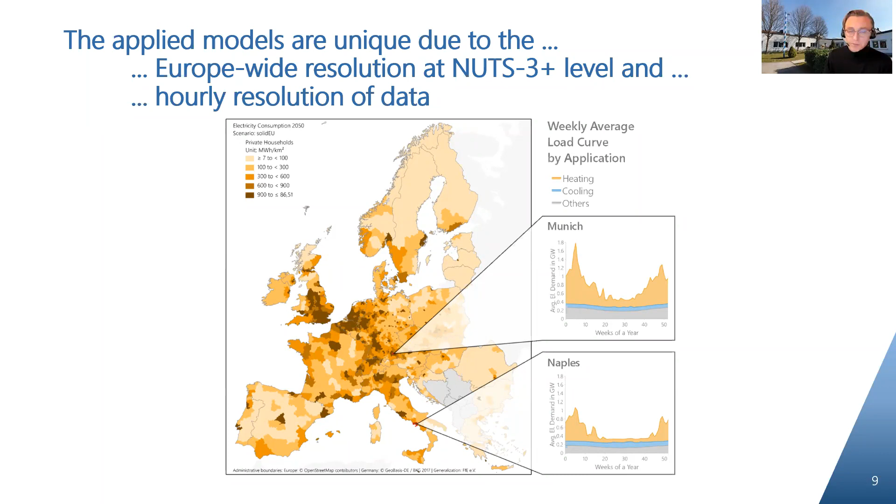What is, I would say, unique about the FFE toolchain and the models we used here is that we achieve a very high regional and temporal resolution with these models, which enables us to achieve the goal that we set out: to analyze Europe and the EU 27 plus 3 countries, but also be able to break down the European transformation pathway into regions in order to show what the challenge we are facing means for the individual stakeholders in each region. These few slides were used to introduce eXtremOS, and I think that's our first point where we can take some questions.

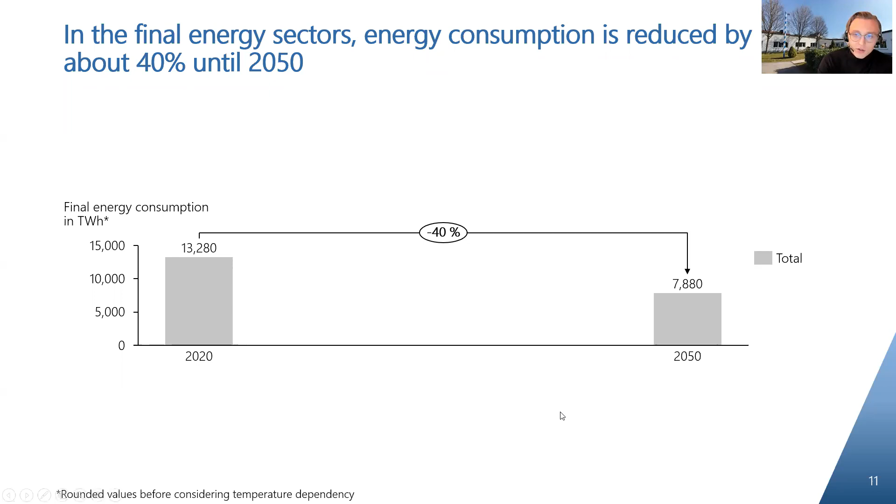And behind these gray bars that you can see in the charts now are the results that we obtained from our detailed sector modeling. And this is still a relatively high level of aggregation when it comes to the data that is actually behind all of this. But if you take the sectoral perspective, we can basically describe what happens in the energy system between 2020 and 2050 by clustering everything that happens in each sector according to these 3 categories.

So that is sort of the macroeconomic perspective, which includes population and gross value added development. And this is based on country and energy industry branch specific data, which shows that, due to slight population and slight economic growth throughout the time period 2020 to 2050, we get a slight increase in the final energy consumption across all sectors. This includes only the mentioned macroeconomic effects.

And it is most pronounced in the industry sector because population increase is relatively low, and there's a slight, on average, 1% per annum increase of the gross value added in the industry sector, leading to a larger increase compared to other sectors.

Then there's the energy efficiency component. This includes a variety of efficiency measures in all three sectors, including very process-specific measures in the industry sector, building refurbishment, etc., in the household sector, which leads to a reduction in final energy consumption.

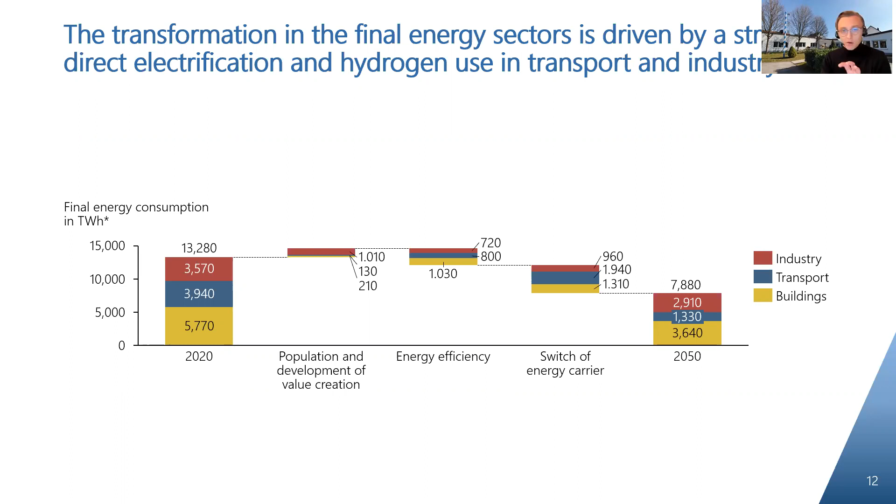Now, this is the sectoral perspective on final energy consumption development and the effect over that period of time. And there's the other very important perspective, which is the energy carrier perspective, and this is shown in the graph here now. So what actually happens with the energy carrier split over time. You can see that in 2020, biomass and electricity roughly account for a third of the final energy consumption. And by 2050, 90% of that final energy consumption is electricity, hydrogen, and biomass.

So these three energy carriers plus synthetic fuels that are required to reach deep emission reduction and which remain in hard to decarbonize areas in these three sectors, such as air travel, are the energy carriers of the future in our Solid EU scenario. Now, this was in very brief terms the development of final energy consumption. Later on during our talk, we'll focus more on the models that are also behind final energy.

But now let's switch the perspective towards the energy supply side and take a look at how energy procurement actually works, starting with hydrogen and then going towards electricity. And for this, I will introduce my colleague Stephan Kigle, who was responsible for the supply side modeling in eXtremOS.

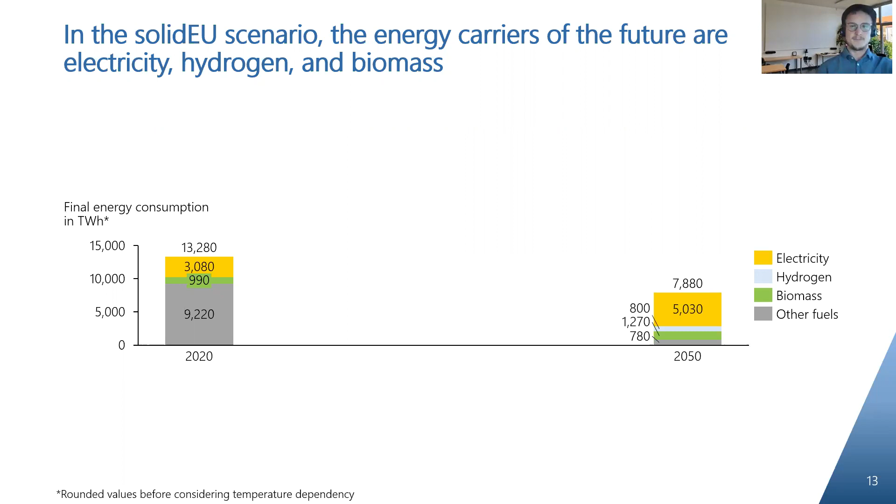Yeah, thank you, Andrej. So at first, we'll now have a look at the hydrogen production side and how our energy system model ISAaR will finally meet the hydrogen demand of the final energy consumption sectors. You just saw that there were 800 terawatt hours of hydrogen demand in the final energy consumption. Additional to that, we also have a hydrogen demand from the industry feedstock, which we have to supply. So in total, we will have to supply roughly 1,000 terawatt hours of hydrogen.

And in Solid EU, we had some assumptions, which I will shine light on in a little more detail in a second, but I want to start with just one main result, and that is if, as in Solid EU, hydrogen is produced exclusively in Europe, there is a need for a seasonal hydrogen storage. The storage is filled at times of high generation from wind and photovoltaics at low electrical loads. So let's have a look at this result in a little more detail on the next slide. Andrej, could you? Yeah, perfect.

I already mentioned that there are some strong assumptions in this type of modeling. So first of all, we have the assumption that hydrogen demand must be met within Europe. So we do not have any import of hydrogen from outside Europe. This is quite strict, but as we are in eXtremOS, which is quite an extreme scenario, I think this assumption is valid, and it's really interesting to see what happens here.

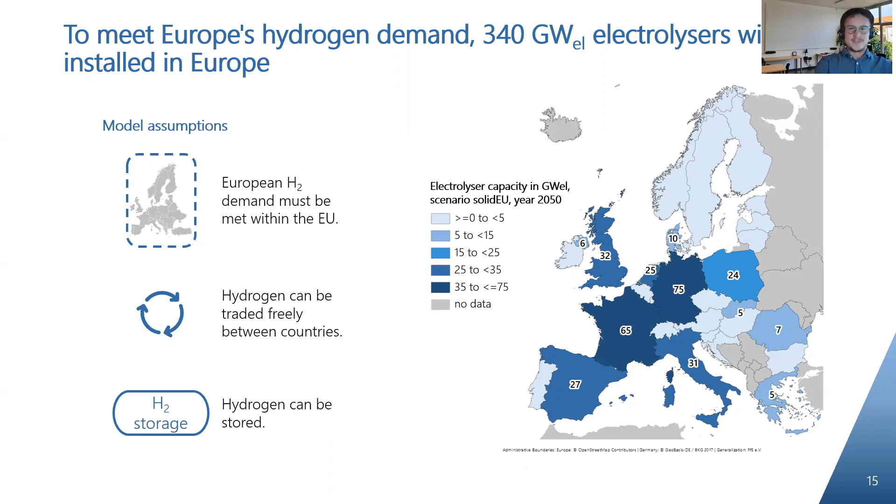But as mentioned in the introductory sentence, I want now to have a look actually at the seasonal storage, because this is what is really interesting. So what we can see here is the fill level of a European hydrogen storage. And you can also see in the upper right-hand part, just to give you an idea, how the capacity evolves over time. Now we are in the year 2050, where we meet our carbon reduction targets. And we can see that our maximum fill level is at 170 terawatt hours. So this is actually the capacity that would be needed to balance seasonal differences of

the renewable energies production. So basically what we can see is that in the first quarter, the hydrogen storage is first emptied. This is due to our year starting in winter. And then we can see that the hydrogen storage is filled up during the second and third quarter, where there is a high generation of renewable electricity from wind and also solar power, while the demand of the final energy consumption sectors in electricity is low. This is due to the fact that in the summer times in Europe, it's quite hot everywhere. So heating demand is reduced. So we do not need that much electricity, and instead can produce hydrogen already that is then stored and used again during the fourth quarter, during winter.

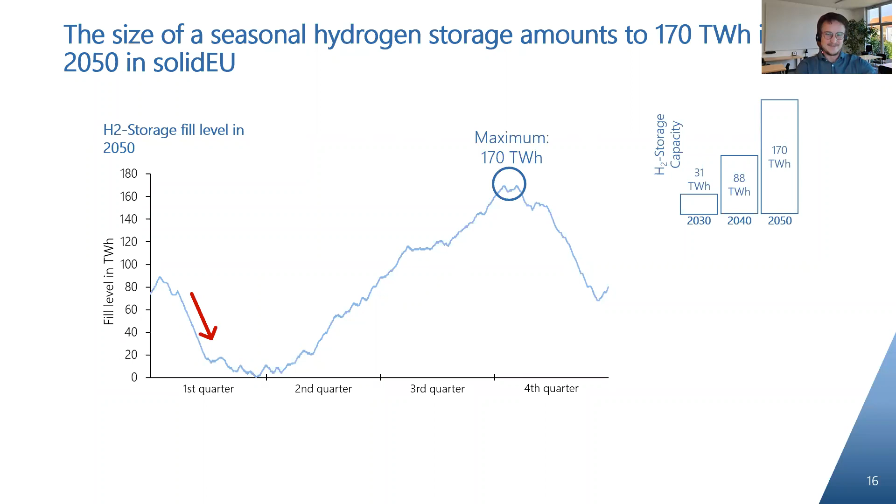So if we have one more click here, Andrej, yeah, maybe a little more, one more click.

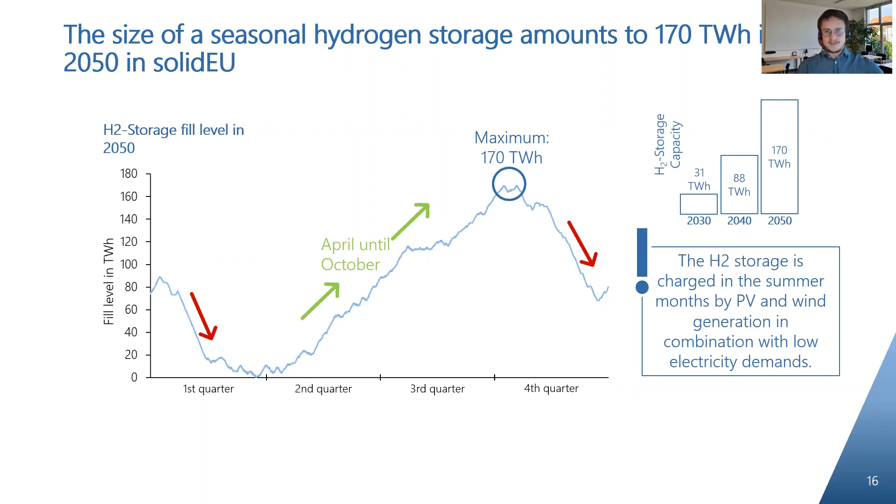The final story that I want to give you is that the hydrogen storage is charged in the summer months and discharged in the winter months. But to produce that hydrogen, I already mentioned it, we need some electricity, which brings us actually to the gross electricity consumption. Because additional to the electricity consumption from the final end energy sectors, we also do have the electricity that needs to be produced for sector coupling technologies like hydrogen or power to heat also.

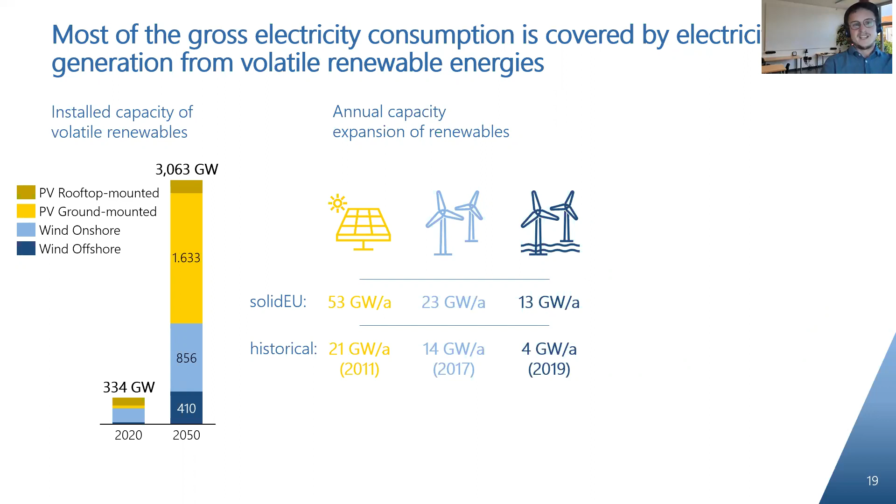If we compare that to historical values, you can see how ambitious this scenario actually is. We have to more than double historic maximum addition values to actually get to the 3,000 gigawatts installed in 2050. But how much energy is actually produced from that? We have more or less 5.5 times the energy produced from all renewable energies compared to 2020.

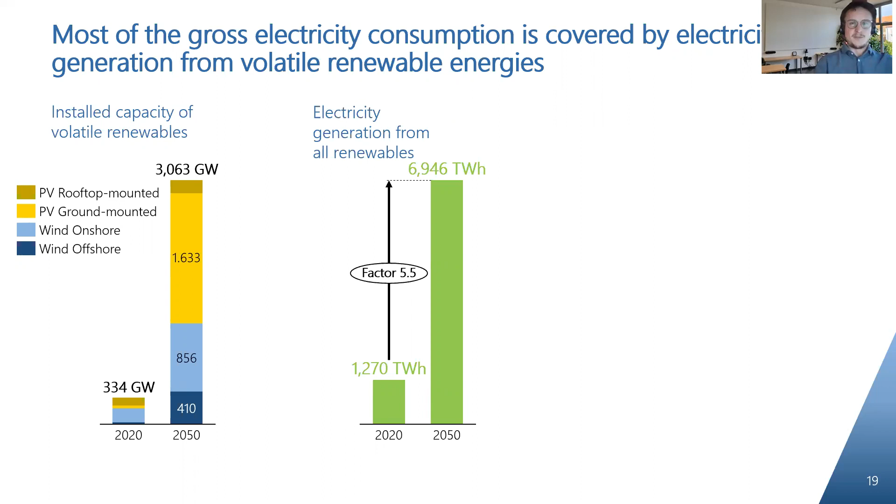And now one would think, okay, well, that's all of it. But of course, we still have some thermal power plants because there are peak load hours that we cannot cover by renewable energy production. So the drop in installed capacities for thermal power plants isn't as big as one would maybe expect. In 2020, we have an installed overall capacity of roughly 500 gigawatts, which then drops to about 450 gigawatts. But what we can see is that the mix of thermal power plants, so what kind of technologies provide the energy produced, also changes.

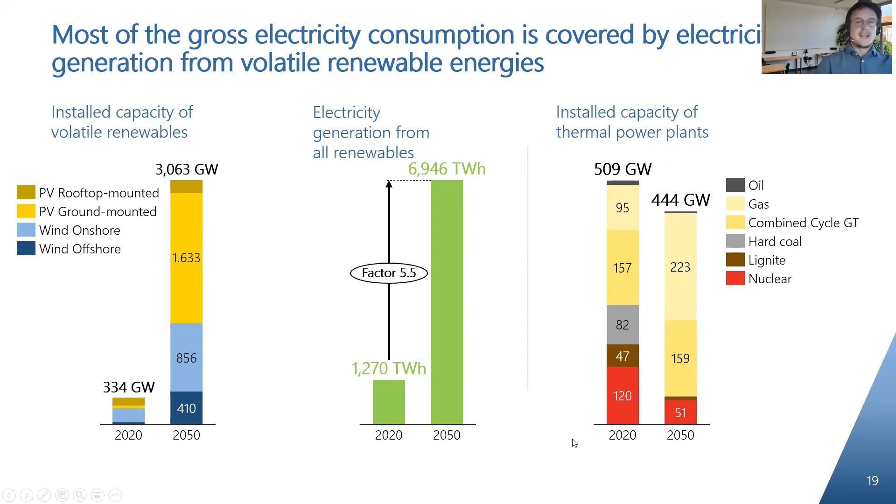We have a phase out of nuclear and a phase out of coal, obviously. But on the other hand, we have an increase of installed capacities of gas and combined cycle gas turbine power plants. So this basically is how our energy system looks in 2050.

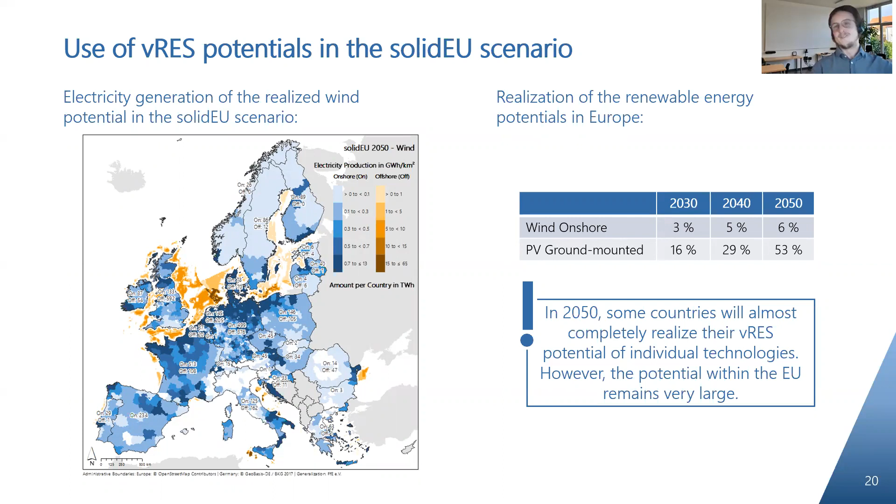Great, thank you, Stephan. So as explained before, we'll take a look at the region of Bavaria, in a smaller spin-off project which we performed for a company in Bavaria. We looked, based on the results that we showed here, at what this actually means in the target year for Bavaria, which is 2040 and not 2050. So for this presentation, we'll look at photovoltaic installation in Bavaria. We also did this for most of the other figures that we showed during the presentation today. But to exemplify this, let's look at photovoltaic.

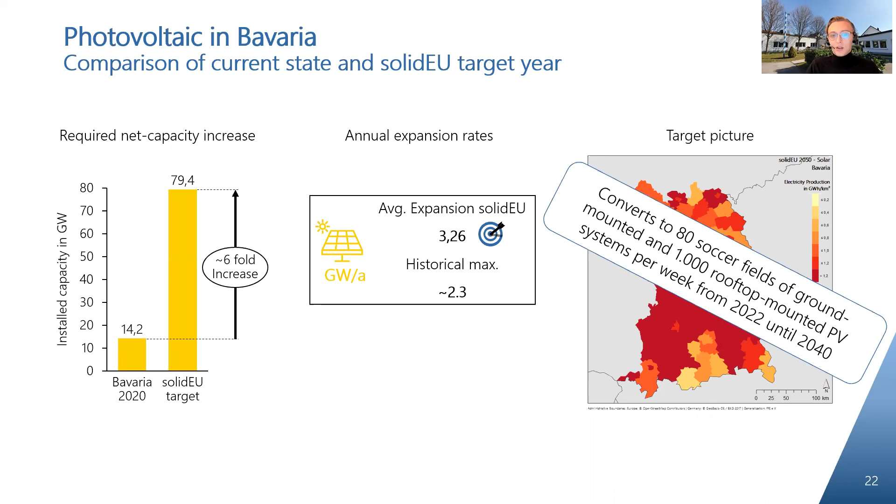And as to the role that we also have in research, I would say this is obviously a very rudimentary message, but it's something that you can remember and can make science accessible for you. So we showed you a number of details, and we will show you more details throughout the presentation. But it's always important to try to communicate the challenge so that each actor knows what they're facing in the future.

Now, as to the learnings, and we are here to learn all together about our research projects, what we took away from the solidEU scenario was that deep emission reduction in Europe can work even if everyone deploys sector coupling measures. So even if everyone goes into intensive electrification in the industry and transport sector, demands hydrogen, demands synthetic fuels, the system still works. And this might seem trivial now, but it was something we asked ourselves in the beginning, and we confirmed this throughout our project.

The second aspect was that the European analysis creates extremely large numbers, which we weren't used to in the beginning, and which many people who focus on their national energy systems might not be used to. So it's always important to break the numbers down, maybe to a regional level, maybe in comparison to historical figures, etc., in order to validate and communicate the results of such a relatively large scenario.

Then we saw, as Stephan showed us, a very interesting result from my perspective, that if hydrogen is produced exclusively in Europe, as we have in our scenario, there's actually a demand for seasonal H2 storage. And ultimately, the gross electricity consumption, very similar to many other scenarios, increases dramatically, and the installation of VRES is the backbone of reaching climate neutrality and deep emission reduction in Europe. So this was the brief rundown of the solidEU scenario, and I hand it over to Annika again.

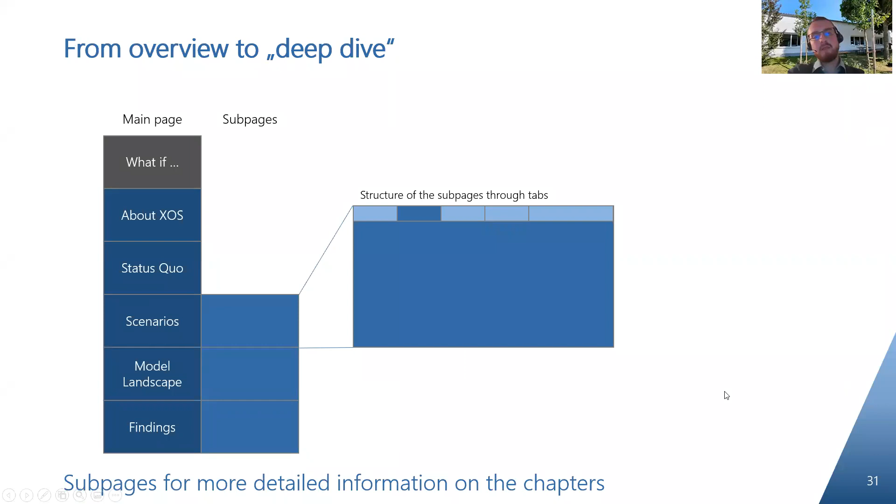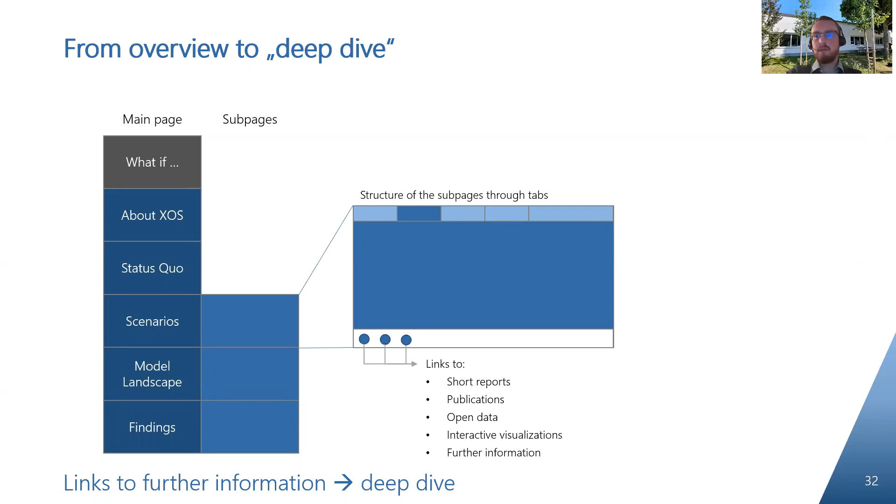And for more detailed information, we created subpages for the chapters, and we have divided these chapters into tabs, and at the end of these tabs, different formats have been linked to get a deeper insight. So there are short reports that you can download as PDF, there are publications, and there are also links to our open data website where you can download licensed data and use it in your own projects.

So we can say that while the story is told from top to bottom, the level of detail increases from left to right. So at the end, we have 3 levels of detail for different audiences. But now enough about the theory. We want to have a look at the website, of course. So I will switch to the browser now.

You can see this now. And the website, the domain is eXtremOS.ffe.de. And it starts with this landing page with these what if questions about the future related to our different scenarios, and then the user has the possibility to dive into the eXtremOS world.

And after an introduction about the project, you can download the results presentation here, as well as our summary report. You can find out more about the research partners behind the project, and you have the possibility to contact the eXtremOS experts. So after this project introduction, the story begins with the status quo of the European energy system, illustrated by these 8 key figures, which are taken up further below.

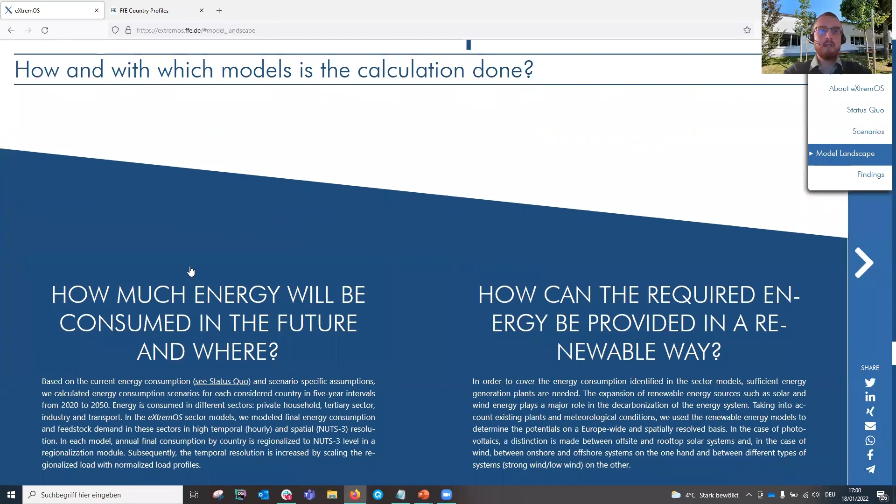And maybe you're interested in our temporally and spatially high resolved final energy consumption in the industry sector. So now we go to this subpage of the sector model industry. There you can get in touch with Andrej if you have a question, or have a look at the structure of the model and also the model results.

And at the end of the page, you can make a deep dive and go to further publications or open data, download it on our open data website here. So back to the eXtremOS website and back to the main page.

Now we come to the last section, the findings. And there you have the opportunity to explore the results in our interactive ISAaR dashboard. That's a dashboard about our energy system model. Another web app. There you have a user guide on how to use this web app. And there you can compare the different scenarios.

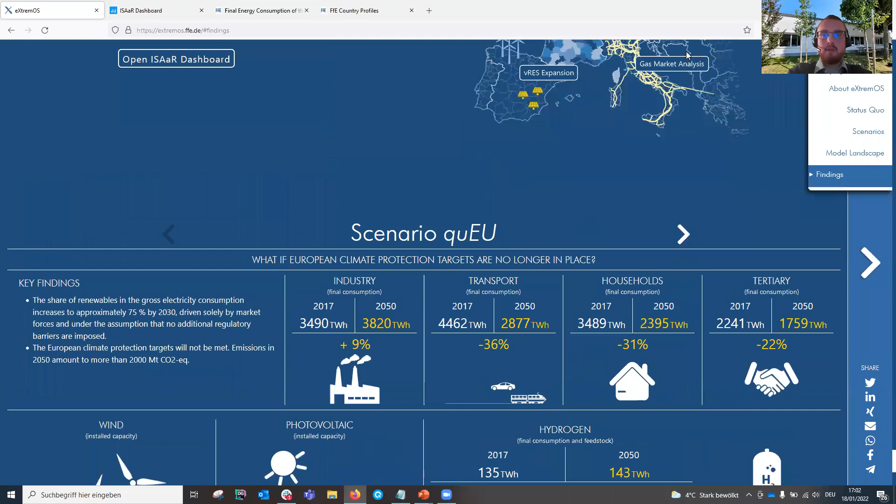For example, solidEU scenario compared to quEU for a certain region, Germany. Electricity as energy carrier, and now you can choose 2050, and you can explore the scenario results in interactive diagrams. So for a quick overview, you can also use this comparison at the very end of the eXtremOS website, and switch to all scenarios here and have a look at the key findings and also the key numbers here.

Or, as in the other chapters above, go into more detail using the arrow on the right, have different tabs for the different scenarios here, ask Stephan a question, or have a look at the key messages or download our visualizations on the scenarios. So this is the end of this short demonstration, and we hope you enjoy discovering our results on the website. And overall, we can say that the effort to present the results in this way was worthwhile.

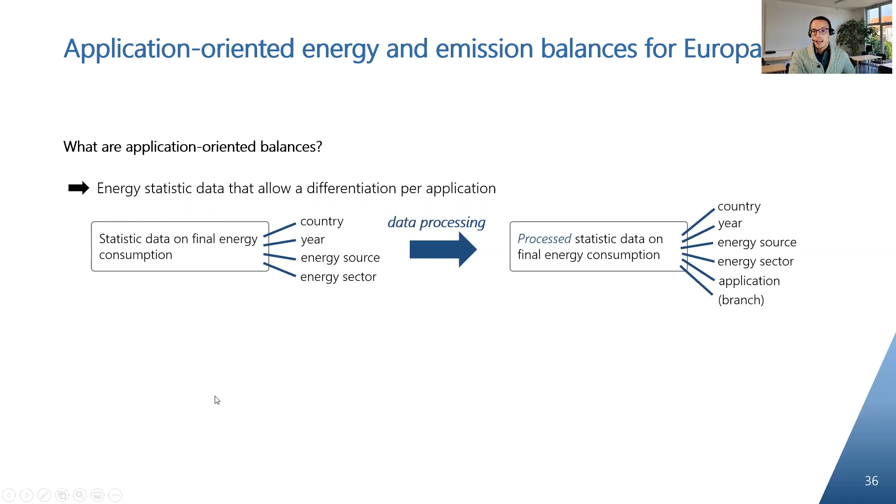And what we now do is we process this data even further, and we get a more detailed set of data, where we then have final energy consumption, not only for year or country, energy source, and energy sector, but also per application within these different categories. And for some of the sectors, we also have a differentiation by branch. So that's basically the set of data we generated.

And what's new about it is that we have this data for 30 European countries and for 4 different years from 2014 to 2017. And we have sets of data for final energy consumption as well as for energy-related CO2 emissions, which is also quite interesting to see. So that means we have a great set of data, which is input parameter for our models, basically for simulations. But you can also use it to just analyze the status quo of the European energy sector in general, and that's why I'm going to show you some of the data later on.

Just briefly, I give you an overview of what we actually did to achieve this level of detail. We have various data sources which we use. To mention the most important one, that's the Eurostat energy balance, which is a general energy balance for European countries which are reporting to Eurostat. And there we have final energy consumption, among other aspects.

And what we did then is we did these application-oriented splits for 4 different sectors, which are the final energy sectors. So for private households, for transportation, for services, and for industry, we developed an application split, which is a share per application per energy source. So that shows us, let's say, what kind of percentage is used as space heating in the private household sector for a certain energy carrier, for example. We used different sources for every aspect, which you can find here.

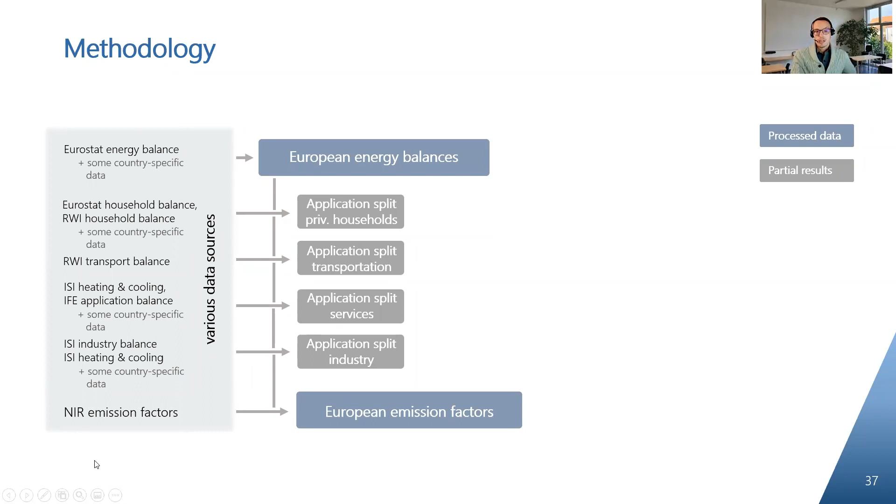And then we also developed emission factors, which are specific for energy carriers and for countries based on the national inventory reports. And by combining these different aspects, first of all, the application splits with the energy balances from Eurostat, we achieved the application-oriented energy balances, and then combining this energy balance with the emission factors, we actually achieved the emission balance.

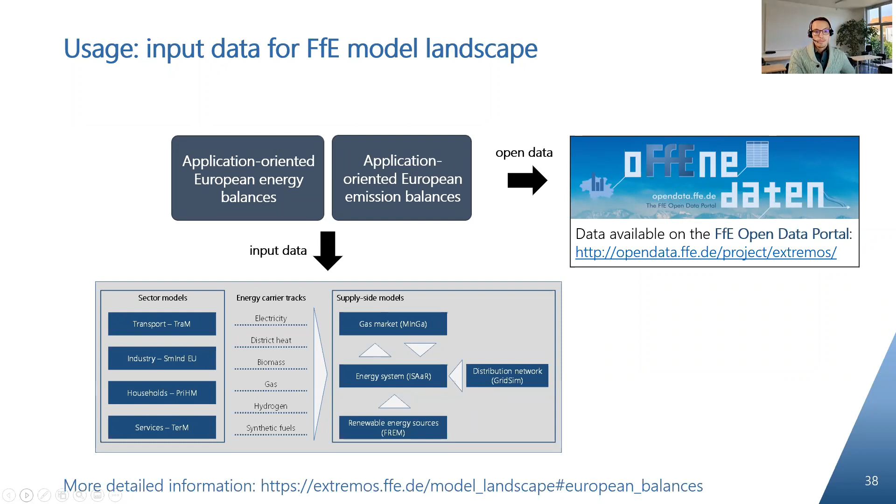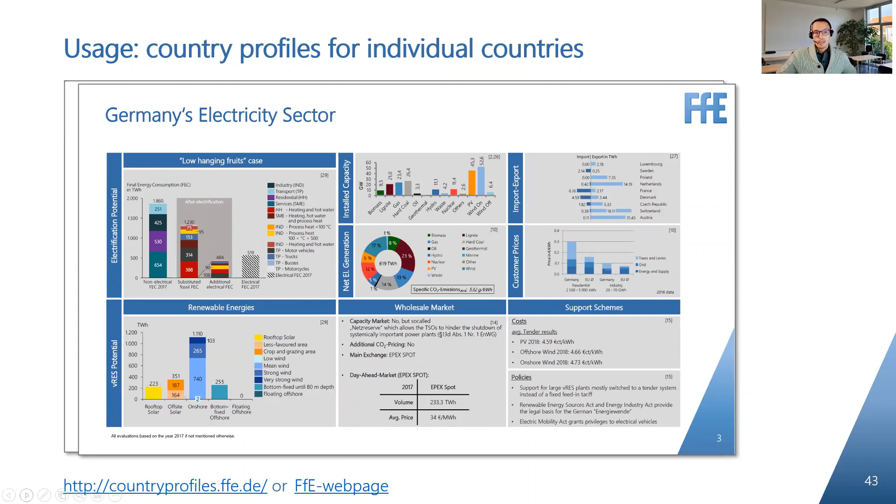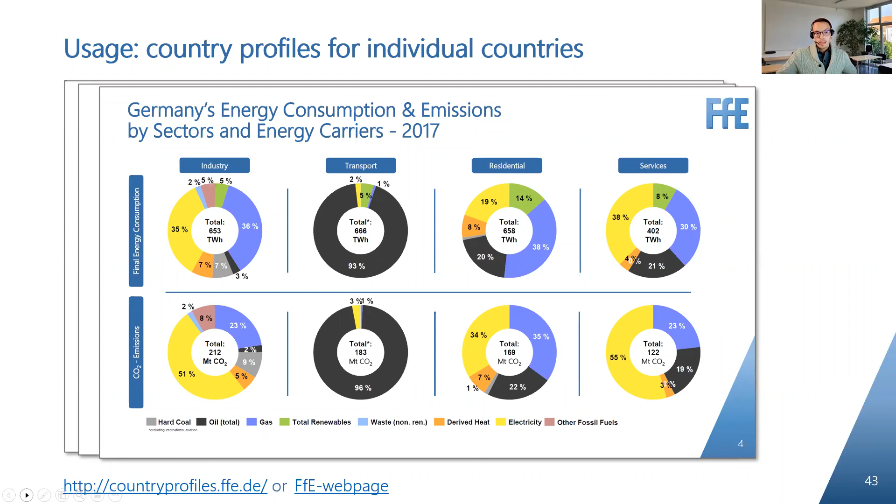And then we have 2 slides for each country where you can find information about the final energy consumption and CO2 emissions. That's the data I just presented, already available for you to compare within these countries, on one slide with the energy sources and on one with the applications. So have a look at this link if you're interested. I think it's a great opportunity if you just want to understand one country better which you don't know about yet.

So that's it briefly from my side about these application-oriented balances. I think the most important takeaway is, well, we validated all our data quite thoroughly. We used it as input, and we're quite confident that it's very easy to use. And we actually have also some publications about the tendency of different balancing methods to show different results. So we did our homework and we compared national sources with these transnational sources of energy balancing methods.

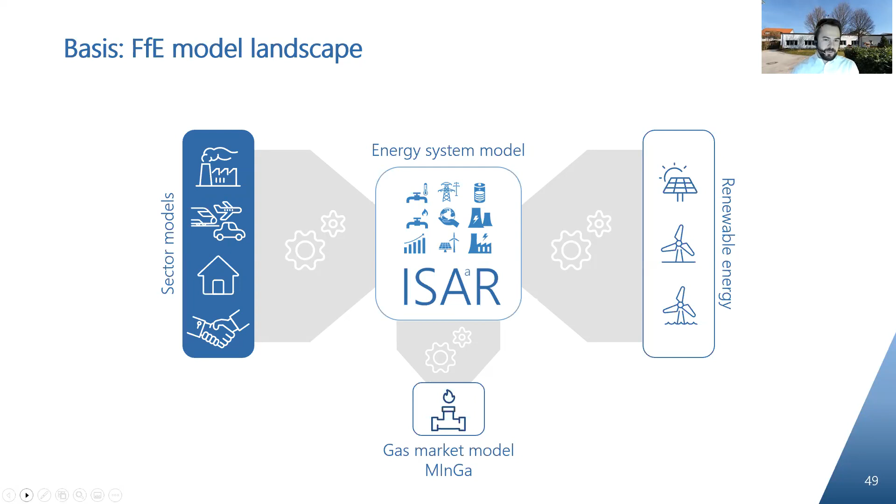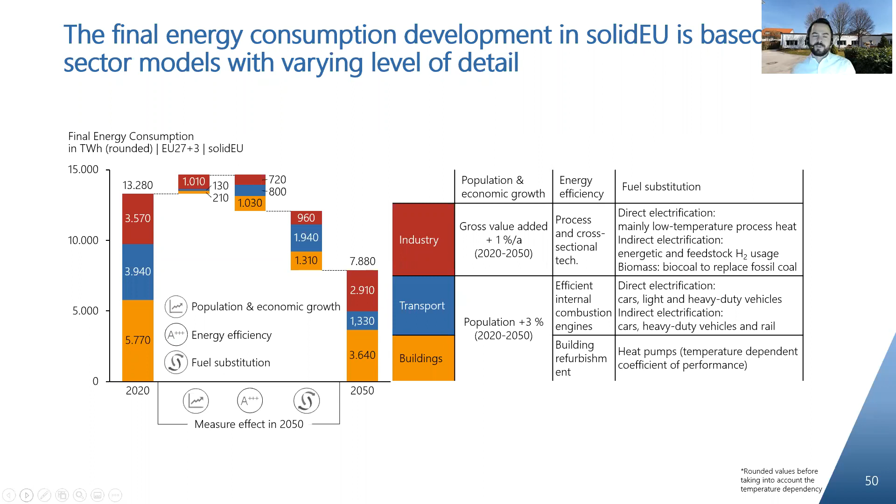So, for instance, we use population development in almost each sector to develop the baseline development of the final energy consumption. And we also use different fuel substitution methods like direct electrification through heat pumps and others to map the development of the final energy consumption over time.

So I think what's kind of special about our sector models is that we can map the sectoral final energy consumption until a certain target here with a very high spatial resolution of NUTS 3 for the whole of Europe and a high temporal resolution of an hour. And it is still easily adaptable to different scenarios because we have a quite generic model structure that we can easily adapt using different input parameters and measures.

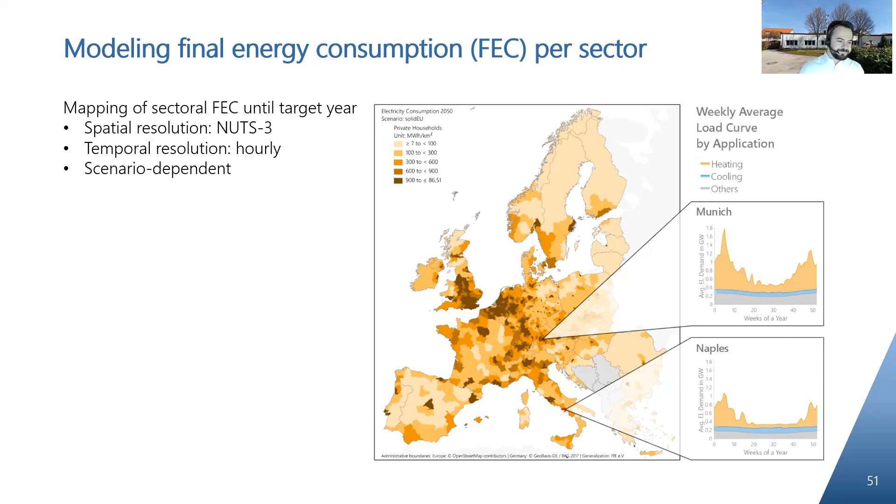So behind this, we have, as I mentioned, a quite generic structure for modeling all the different sectors. So that's what we call the backbone of our sector models. When I talk of sectors, I mean, in this case, industry, transport, households and services. And also we're often talking about the building sector as a combination of households and services. So this generic model structure consists basically of 3 pillars. The first one is what we call final consumption. That's the final energy consumption per country, so on a national level, per technology and per application.

The second pillar is the regionalization model, where we break those national values apart into the different regions to get the regional dimension of the consumption. And in the third pillar, we use different load profiles to get our time-dependent resolution of the load. Yes, and when combining the results of those 3 pillars, we get the load curves per NUTS 3 level, per technology, per energy carrier, and per application. And then the next step is, of course, to model the development of the final energy consumption over time until a certain target here. And to do this, we use different measures and effects, which I'm going to talk about in a second.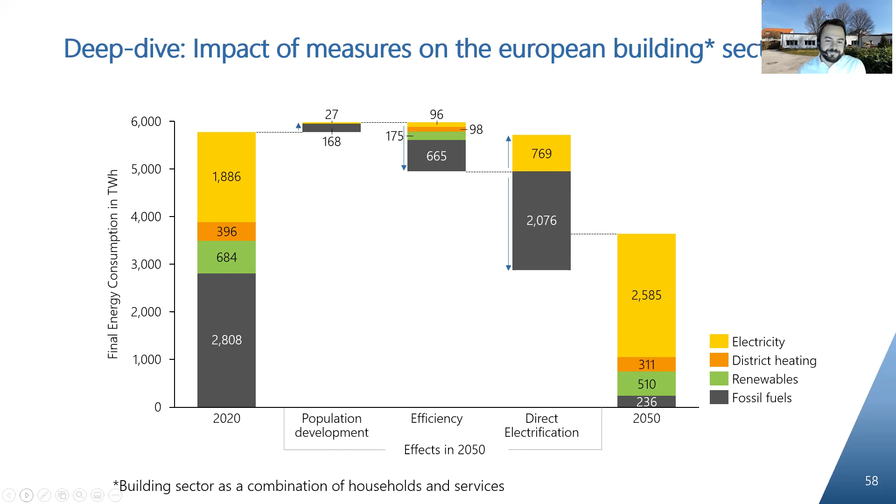So which parameters and measures got us there? What did we implement into our sector models to get to these results? First, in the final consumption pillar for the modeling of the national values, we used energy balances per technology and application and combined them with country-specific ages of heating systems. To get the regional component, we used population and typical heating systems data per NUTS 3 region, and also integrated degree days to get the climatic relations depending on the region.

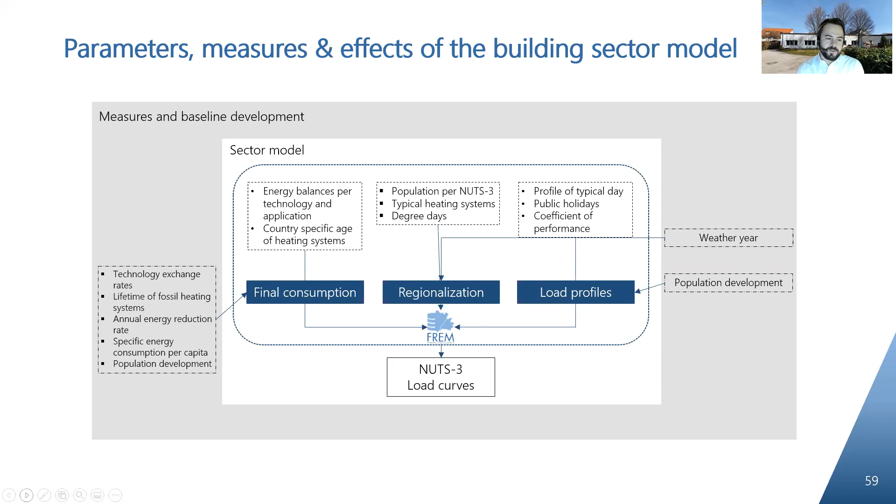To get the temporal resolution, we use typical load profiles of typical days, regarding also public holidays, and different coefficients of performance to get our load curves per NUTS 3 region. To map the development over time, we used what you can see on the left side. We identified different parameters and descriptors like technology exchange rates, typical lifetimes of fossil heating systems, annual energy reduction rates, specific energy consumption per capita, and of course the population development. And we summarized those under three measures, what I call here measures and developments.

So of course the baseline development is again leading to an increase of final energy consumption through the increase of absolute population numbers in Europe. Second, the efficiency measure, combining energetic refurbishment, insulation, and so on, is leading to an increase of efficiency in space heating, which we implemented through a yearly reduction rate of final energy consumption by 1.1%. And third, we have the measure of technological modernization, resembling the exchange of fossil boilers at their respective end of life by heat pumps in the space heating and hot water application.

Let's have a look at the transport sector. You can see a similar image here. In Europe, we have around 4,000 terawatt hours final energy consumption in 2020. That's almost 100% made up of fossil fuel share. And again, we see a slight increase through the population development until 2050 and a strong decrease of around 800 terawatt hours through different efficiency measures.

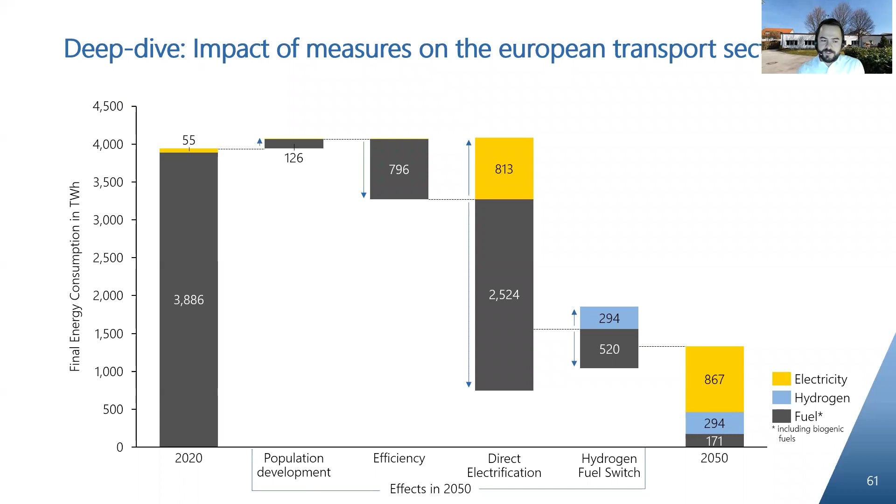And similar to the heat pump direct electrification of the building sector, we see a strong decrease of around 2,500 terawatt hours through direct electrification measures. And again, an increase of the electricity share of around 800 terawatt hours. In the transport sector, we also have a fourth measure that we call hydrogen fuel switch, where we implemented the exchange of combustion vehicles through fuel cell vehicles.

So I will also give you a quick look at the parameters that we used for modeling the transport sector. First, to get the national values, we again use population data and typical transport performances, specific consumption per vehicles, and the absolute number of vehicles per country. And to break those apart into the different regions, we use population per NUTS 3 and recent number of vehicles per NUTS 3 in those regions.

To get the temporal component into our load profile and our results, we use different load profiles that respect the typical vehicle consumptions by model, different availabilities of charging infrastructure, battery capacities, and also different plug-in behaviors.

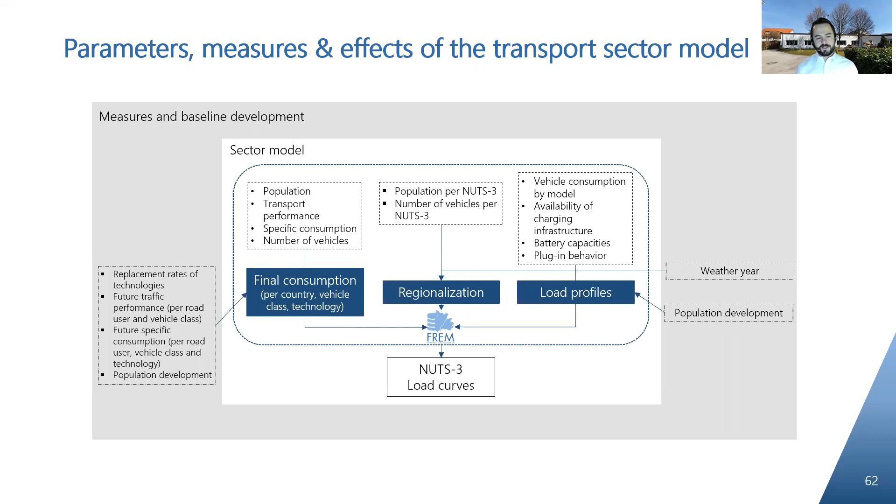On the left side, you can again see the different descriptors that we identified to map the development of the consumption over time. And in the case of the transport sector, those are replacement rates of the different technologies, future traffic performance, future specific consumption per road user, vehicle class, and technology, and again, the population development.

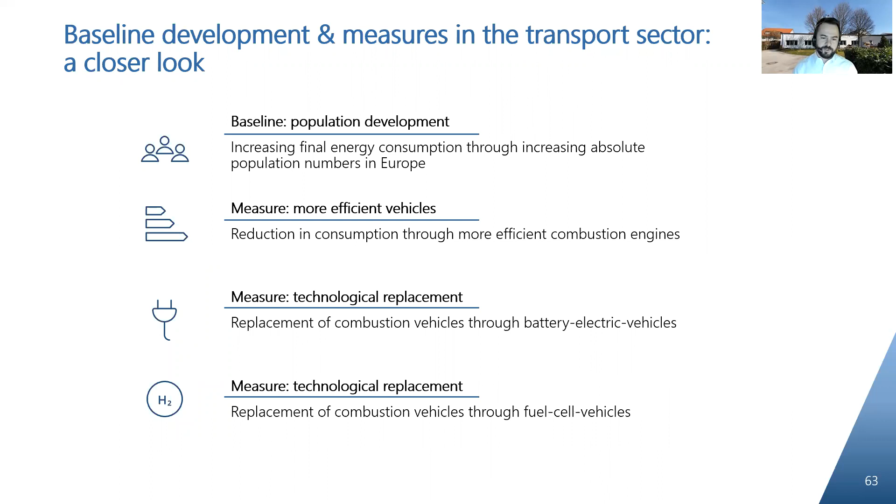So we summarized those again for the transport sector. I already talked enough about the baseline development of the population increase, but for the efficiency measures, we see more efficient vehicles. So we get a reduction in consumption through more efficient combustion engines. Then we have two technological replacement measures. One is replacement of combustion vehicles through BEVs, and the second, what I already talked about, the replacement of combustion vehicles through fuel cell vehicles.

So what did we learn from modeling the final energy consumption per sector? Well, if models are newly set up, it is really worthwhile to formalize the calculation logics in advance and to stick to them during the implementation. And when struggling during the modeling somewhere down the road, you can always go back and have a look at your initial calculations. So that was really worthwhile to us, that we initially sat down and really thought about what we were going to do.

Second, our modular structure, think about the pillars that I talked about, the final energy consumption, the regionalization, and the load profiles, really brings us many advantages in terms of the maintainability and the further development options. So if we're going to integrate new sectors and need new sector models, then we can just go back to our generic structure, exchange measures and parameters, and easily adapt our models.

And what we also realized is that many inaccuracies only become apparent during the discussion of the results and in presentations like we're doing now, or papers and reports. So publishing on an ongoing basis really helps to ensure that errors can be identified early and also corrected at an early stage. So what's the future of our final energy consumption models?

Well, in the follow-up project TransHyDE-Sys, we're going to use them, work with them and rebuild them somehow. So first, we're going to have a kind of general revision. What we want to implement is a stronger automated consideration of intersectoral relationships. Also, we want to focus more on country-specific transformation paths, and on costs in detail. Also, we want to implement stronger links between political decisions and their respective effects on the sector measures.

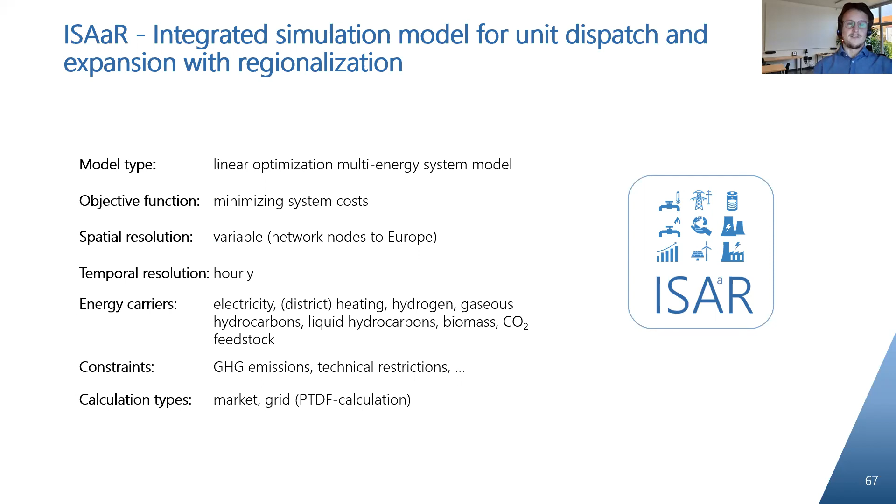We do have different constraints on our optimization problem. So in eXtremOS, as mentioned in the beginning, we do have a GHG emissions cap. So we can limit the amount of emissions that are allowed to be emitted by the technologies. And of course, we do have more technical restrictions on individual technologies. What we can do with this type of model is market calculations and also grid calculations. What you now saw is basically market calculations. I'll come to the grid calculations also in a second.

But just to give you a more detailed idea of how interconnected all the technologies, energy carriers, and so on are with each other, I brought you this slide. I won't go into detail as time is already quite advanced, but here it is basically shown the energy carriers and all the different components that interconnect the energy carriers with each other. And behind these components, there's even more detailed technologies. So every component you can see here can have more distinct technologies behind it with different efficiencies, different costs, and so on. So that's basically everything that's included in the model.

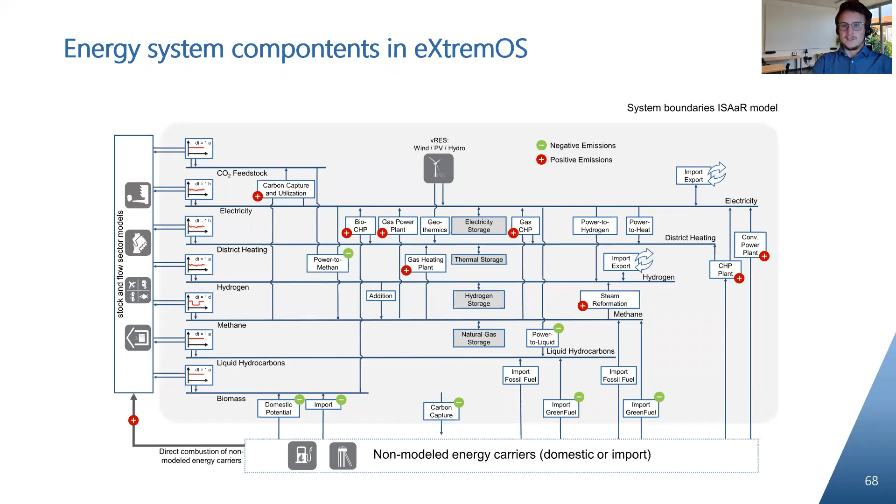So as I already mentioned, in eXtremOS we had a look at market calculations. So what does that mean? Basically, we calculated for the whole of Europe how the markets interact, but what we did not have in detail in the modeling is actually the infrastructure that's needed to transport any energy carrier from one region to another region. We just had an integration of stylized European distribution grids, if you want to call it like that.

So that means that, for example, exchange rates between countries are limited for electricity, for hydrogen, just to represent how it's actually working in the European transmission grid, as we're not a totally integrated European energy market, but there's still more regional energy markets that for themselves build their prices and so on. So that's what was integrated in eXtremOS.

And what we now want to do when going to TransHyDE is really shift the focus onto modeling also the infrastructure, especially the electricity infrastructure and the hydrogen infrastructure, as the hydrogen infrastructure is of great importance, as we have seen, and especially to see how hydrogen can and will be traded throughout Europe, and what kind of new infrastructure is needed to really supply the amount of hydrogen we want to supply to the region we want to supply it to. So that's basically what our focus is going to be in the next project. And yeah, we're quite excited what kind of answers we'll get out of this.